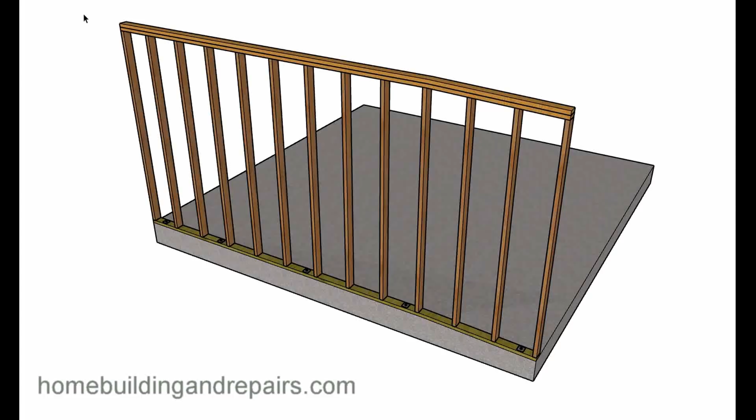In this video, I will help you figure out how to straighten a wall.

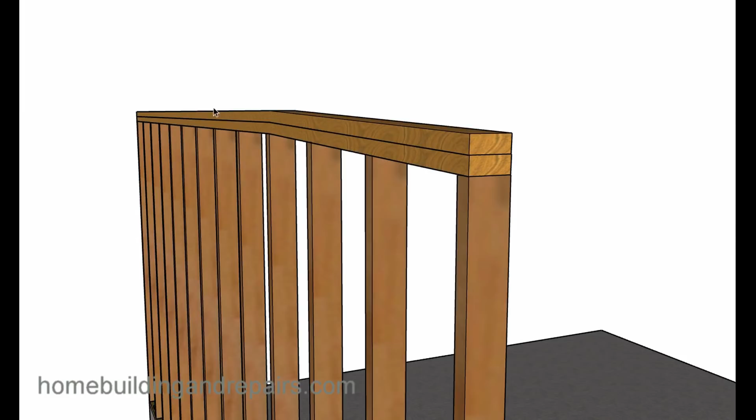It's not uncommon to come to a concrete foundation and have irregularities in it, especially in an existing home. The corner of the foundation might be sinking down, which is kind of what I have here. And of course, it usually creates a problem at the top also, as you can see right there.

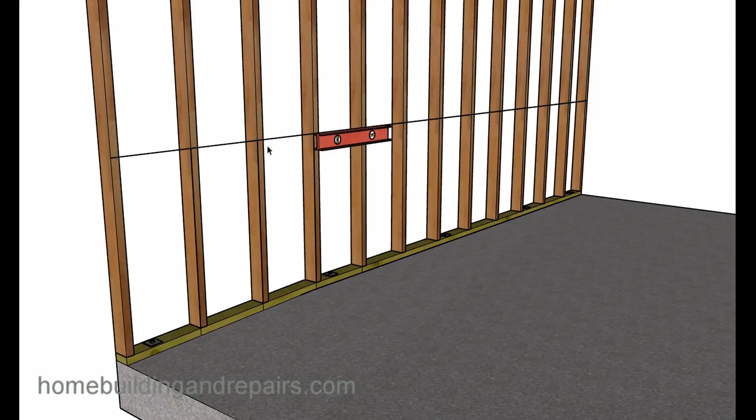So a lot of times if the foundation is off, the top of the wall framing is going to be off also. The first thing you will need to do is create some type of a straight line, something that is level, and have it run all the way across the length of the wall, not just in the area you're going to be working on.

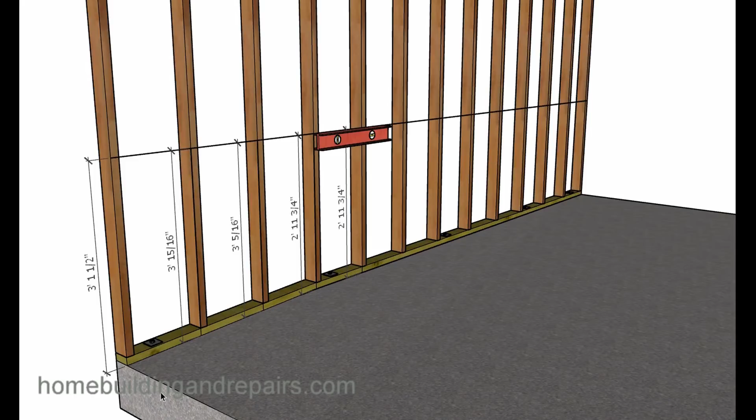Then we're going to use this line to create measurements. You're just going to measure from each individual stud. It's not uncommon, if you have a dip somewhere here, to have it in other areas of the wall. So you can use this to check that out, because some of these might need to be raised also.

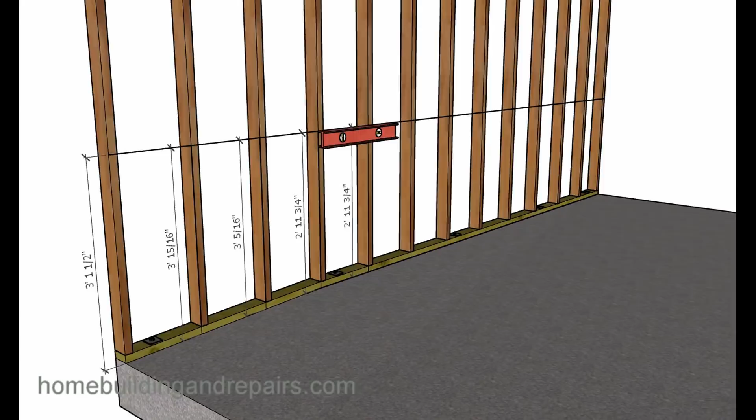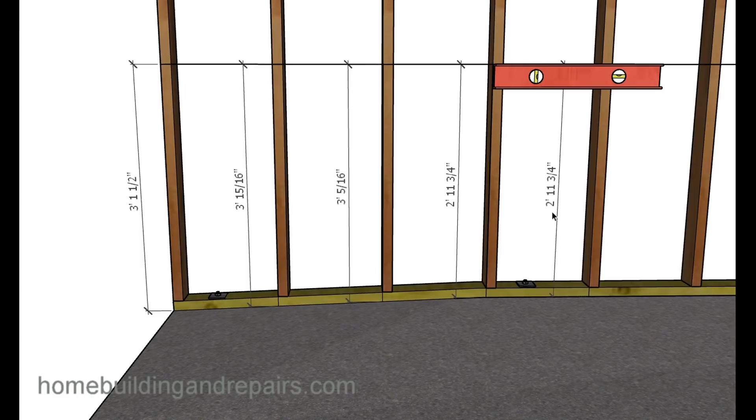So let's go ahead and take a look. I put a pretty big dip in here, and if you measure back, you're going to find a constant, something with the same measurement. This will be the measurement that you will use to adjust the sag or the dip in the foundation.

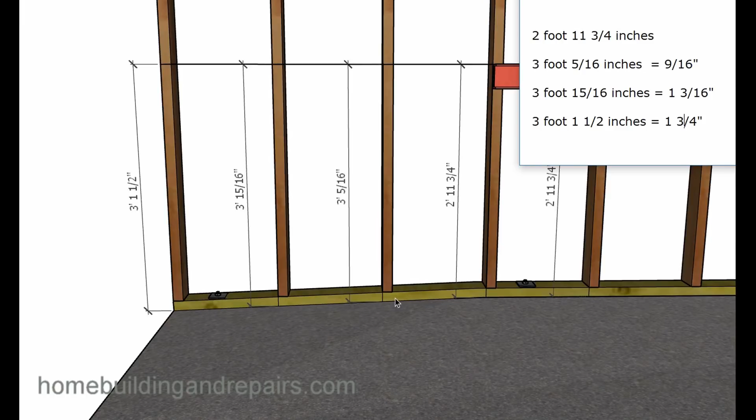Let's go ahead and bring up the numbers here. I have 2 foot 11 3/4. That's the standard. If I subtract that from these measurements, it's going to provide me with the measurements I will need to raise the wall. And of course, we'll use that later on to figure out our shims.

Kind of wanted to give you an idea here, not to think that I'm measuring from this section here. I am measuring from here. And you might even be better to measure from here, if you have a sag where it's dipping, which is not going to be uncommon.

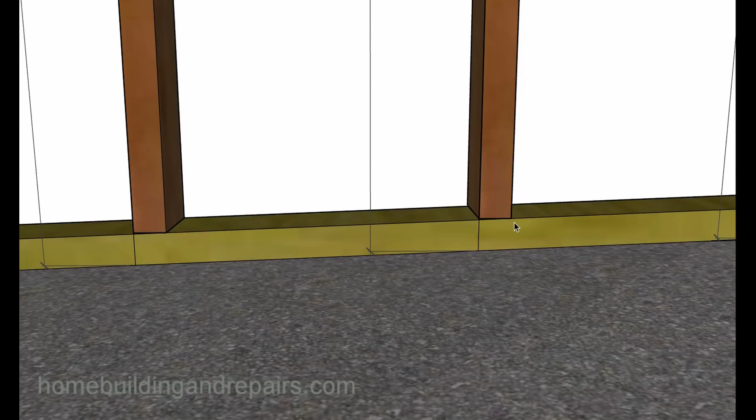If it's a steep slope, you might have to actually angle the bottom of the stud, or cut your pieces that you're going to use later to fill. They might actually have to be angled. So it might be better to take your measurements from the short point and not the long point.

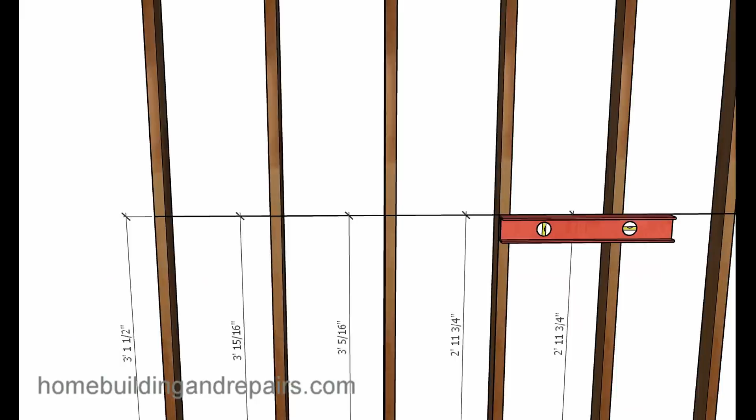Hope that makes sense. Again, just kind of wanted to give you an idea of the top—I'm measuring from here down to the bottom. So again, straight line, get your measurements, and then check the rest of the wall also.

Next up on the list will be to install a few jacks with some 4x4s or 2x4s nailed together, whatever you think you will need to straighten out the wall. Now, don't be confused—it's not uncommon to have wood that is warped and you're not going to be able to straighten it out. If that's the case, then you're going to need to replace the damaged wall framing plate.

So again, over the years, something sags down. If this is new construction, it's not going to be a problem. But if it's something that's been around for 10 years or longer, there's a good chance that this stuff will be difficult to move.

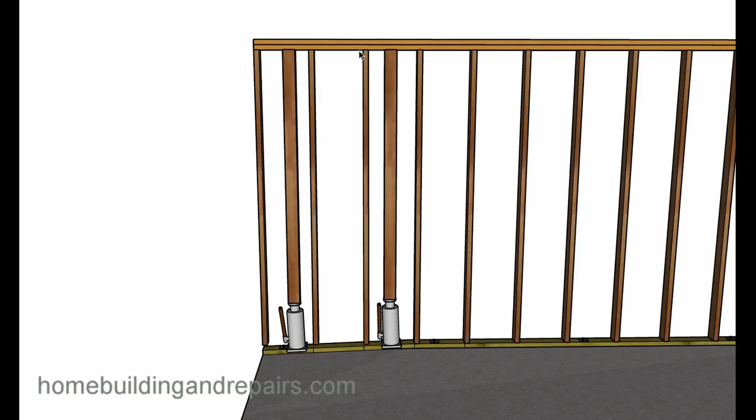And when I say move it, if you have a sag something like this, you might actually be able to just cut the framing plates, make the adjustment, and then put a strap across here also.

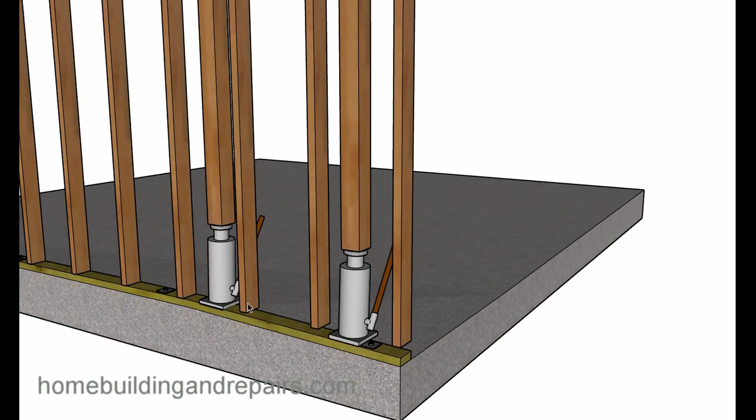This type of repair might need to be done without the exterior or interior materials. If you have drywall on the inside or plaster, it might need to be removed. If you have stucco or siding on the outside, that might need to be removed also, so that you can actually move the wall.

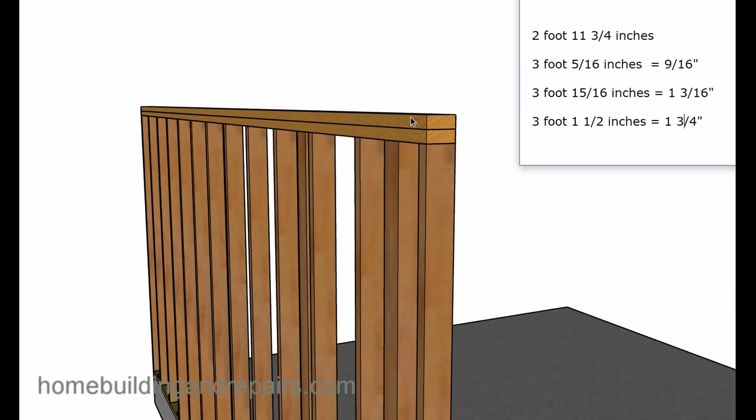So you're simply going to raise it up to the desired height that we figured out here, and then put a spacer underneath it, and there it is, nice and straight. It always looks nice on the computer—might not look this way on your type of repair, so let's not get carried away thinking we're going to get this thing perfect, but it'll definitely be better.

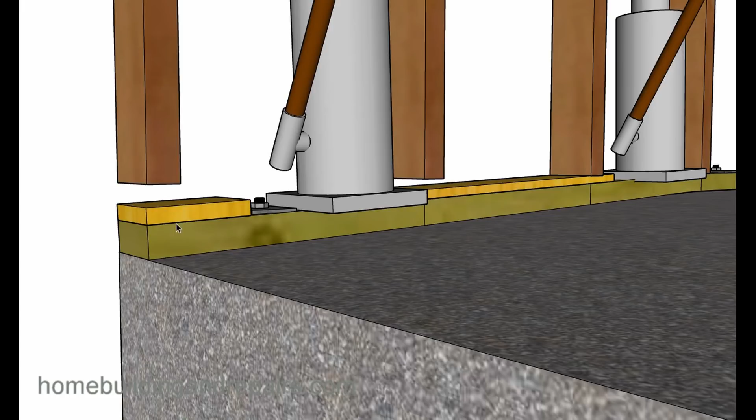After the top plate has been raised, we can simply install some plywood or something. I don't recommend using a 1x4—if you do, you might need to drill some type of pilot hole, because it could crack. I'd rather use plywood for something like this.

You can get plywood in different measurements, whatever you need, and you could always rip the plywood down also to make it fit. Maybe just use some screws to screw everything together. Put the screws in, using a board to screw it in here.

Now, if a 2x4 is going to work here, go for it. The only concern I would have is splitting it—you do not want to drive some nails in or use some screws and end up splitting the wood. That's not going to help you out here.

And that is it for the repair. Hopefully it straightens everything out, or at least gets it a little better. And remember, if you get something within a quarter of an inch, you could always use some type of plywood, cardboard, shims, or something like that used for straightening walls, to straighten the rest of it also.